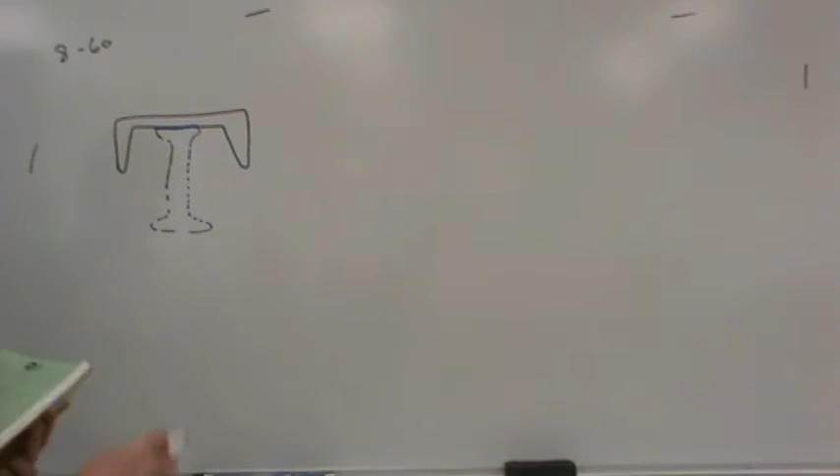Since that's the case, we'll have to choose a particular area and use it to calculate Q somewhere along the way. The particular area I chose is the area beyond. Now I just realized I made a mistake because I chose all of this area.

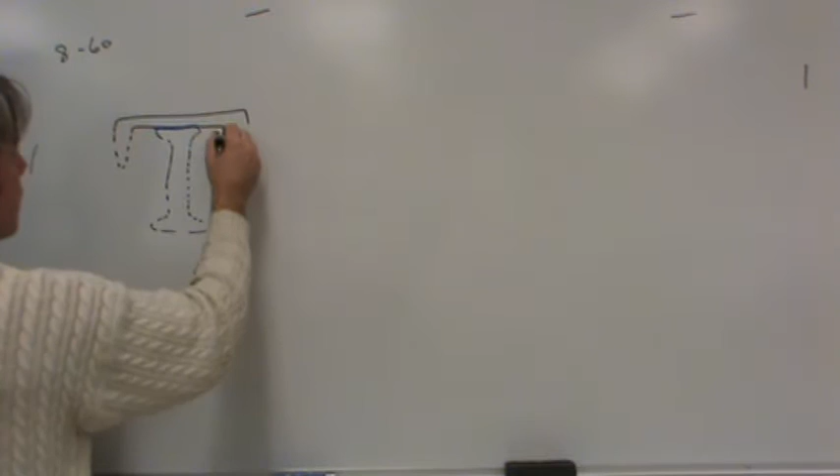I should have this also dotted because that area means I'll have to modify my solution, okay? But that's okay, we can do that on the fly. I should get a number fairly close.

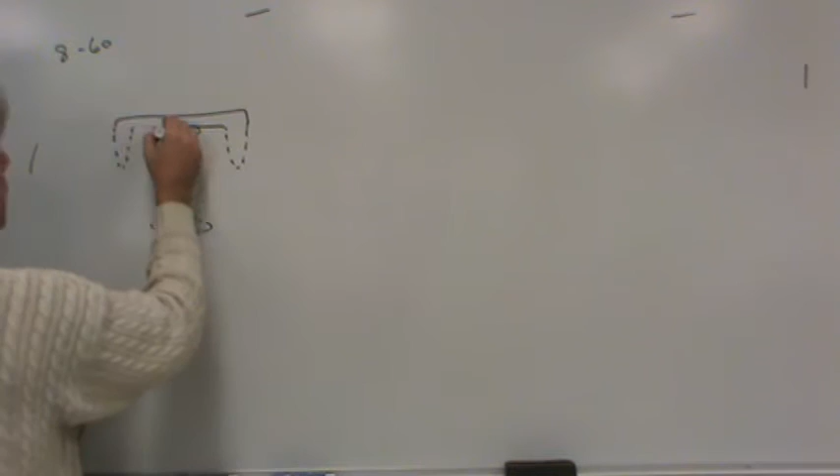Anyway, the particular area that I will choose -- oh, that one doesn't work, it won't show up on board or on video or anything. Let's try this one, see what happens.

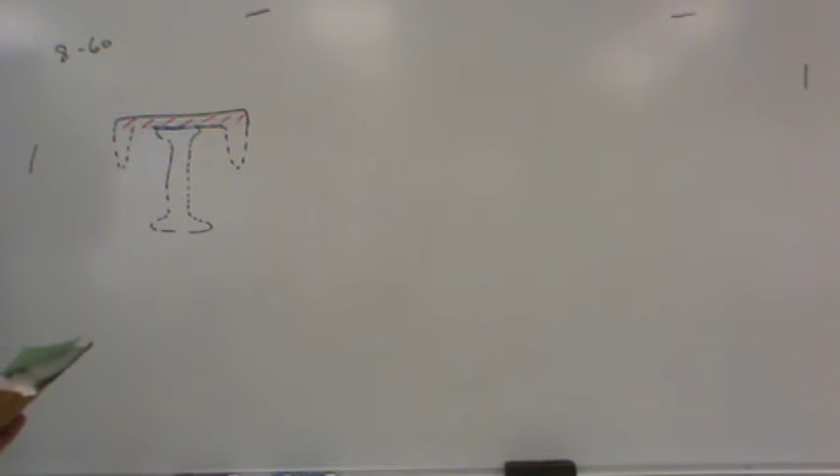Notice what I have to do is choose all the area beyond the axis of interest, okay? So we've got a small problem here though. Well, we'll get to that in a minute. All right, so

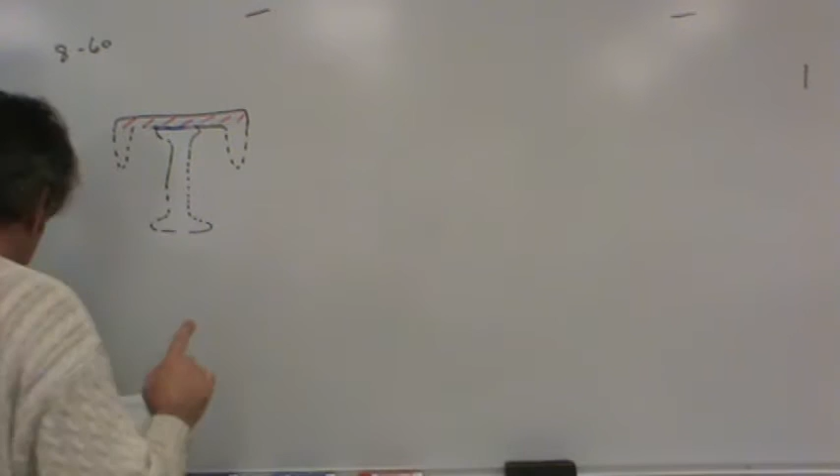really what we're trying to do is get at the shear flow, right? And the shear flow is calculated as VQ over I. Now, what I are we talking about here?

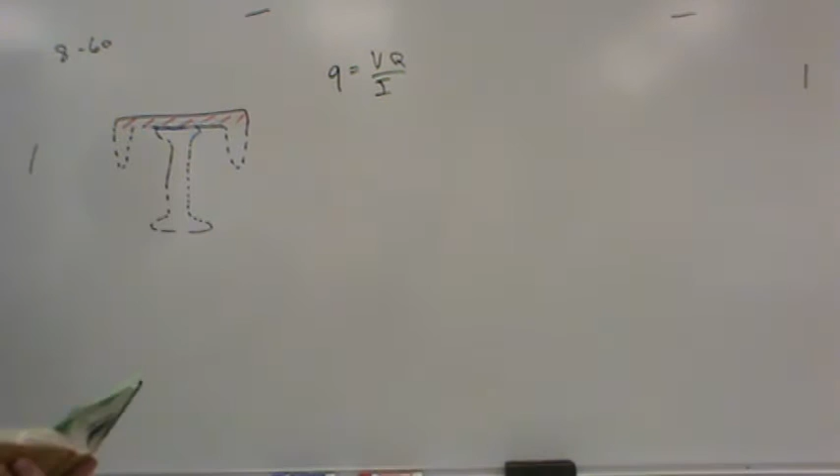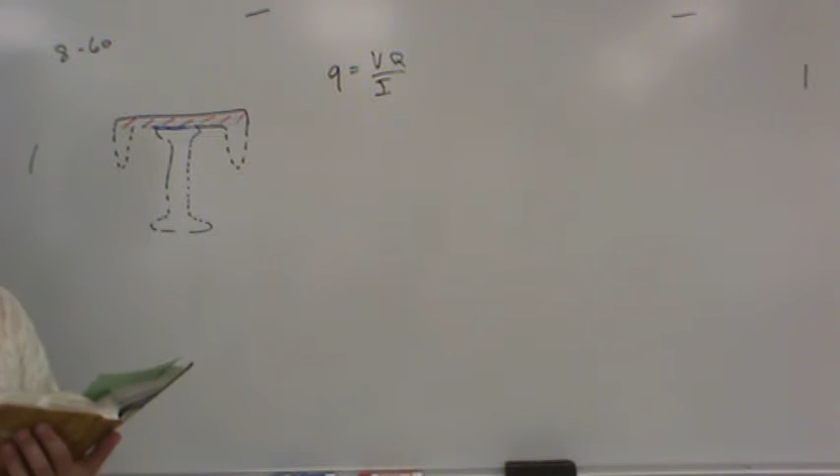Is it the I of this beam or the I of the channel? The whole thing. The whole thing, right? That's a trick question -- it's actually both together because this is all one area. Okay, so we need the I for all of this.

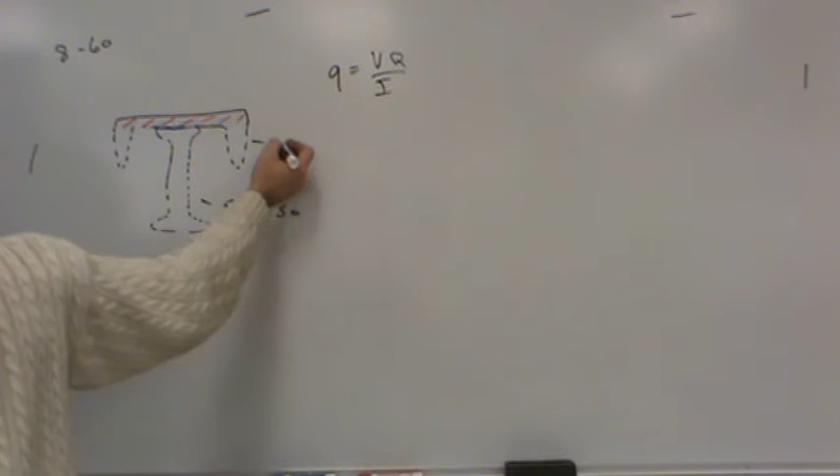Well, I did that. What I did is I went to the back of the book and I looked up the two shapes. This is an S12 by 50, and this is a C12 by 25. So I actually put a piece of paper back there in those two places so I could find all the properties I wanted.

And I started off my solution in Excel. In fact, if you look at my solution, what you'll find is I did a lot of work in Excel just because it was easier that way. So I wrote down the part numbers, the S12 by 50 and the C12 by 25.

I just read off the areas from the back -- that was easy. I read off the inertia moments from the back -- that was simple. Okay, now you have to be careful with the C channel.

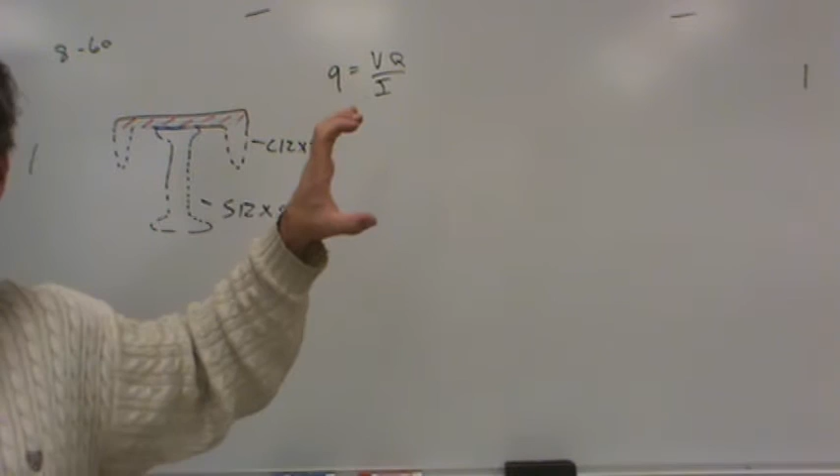The C channel in the back of the book is oriented like this, but we're using it like this. So I needed the area moment of inertia about this axis, which is the YY axis in the back of the book. Does that make sense?

You have to be a little bit careful about that, but anyway, there it is. And what about Y? What is Y? Well, Y is the distance from the very bottom up to the centroid of the area.

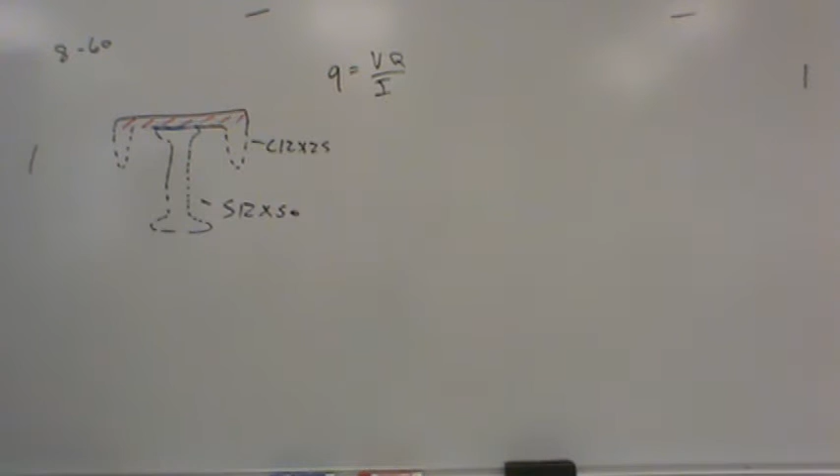So how tall is that S-beam? Did you look that up yet? It's 12 inches, that's right. So where's the centroid? 6 inches, right? So that's why I've got 6 inches here in cell C2.

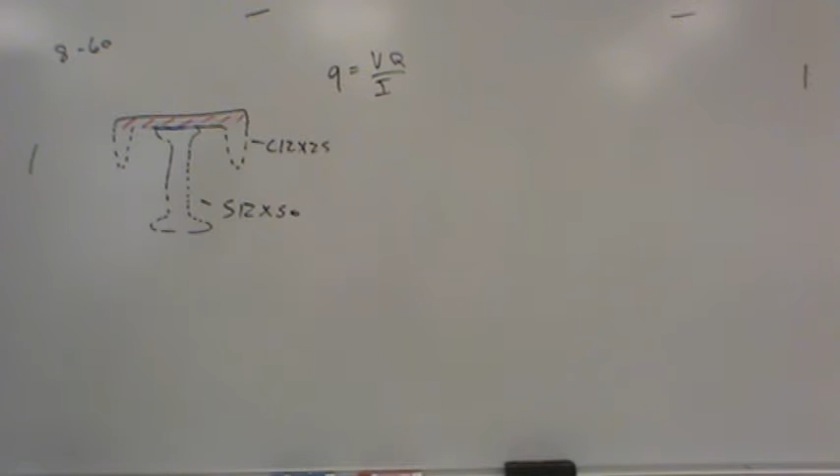Okay, now we also need the centroid of the channel, and that one's not quite as easy. The way I did that is since this dimension is 12 inches, all I need is the web thickness, okay?

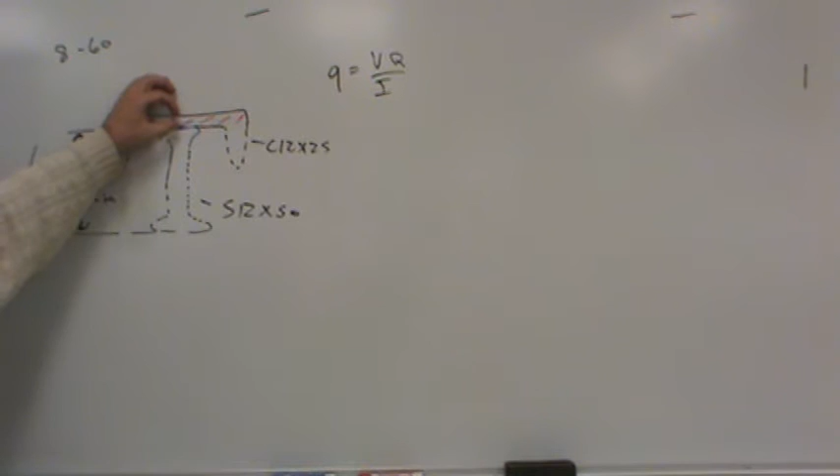So if you go and look up the web thickness in the back of the book, you'll find that it is 0.387. How do I know that? Because I typed it in as a formula so that if I ever thought I made a mistake, I could go back and see what I did wrong.

So I've got my 12 inches for the height of the S shape, and then I've got 0.387 for the thickness of the web. So that's the dimension from here all the way up to the top. So here's the extra -- let's try that a little better -- 0.387, okay?

And then, but I want the distance from the bottom to the centroid of this shape. Okay, now be careful, I'm talking about the whole thing right now. Ignore the dotted lines for just a minute, okay? So to the centroid of that -- well, where is the centroid of that shape? Well, if you look at the back of the book, you'll see that they give a distance x.

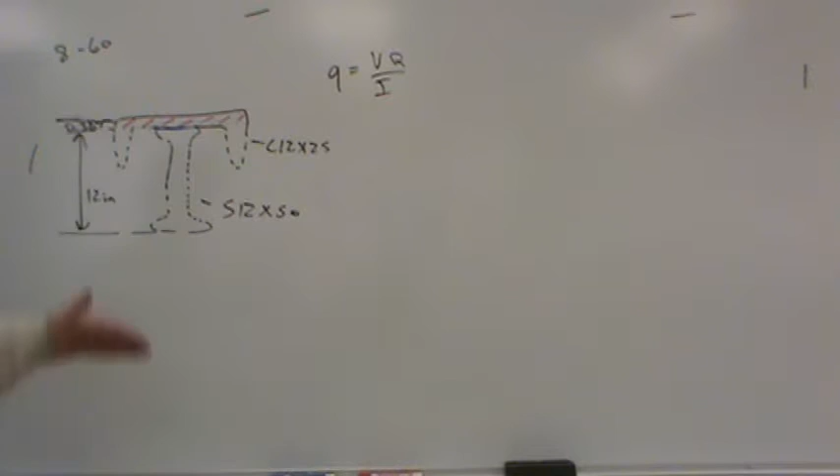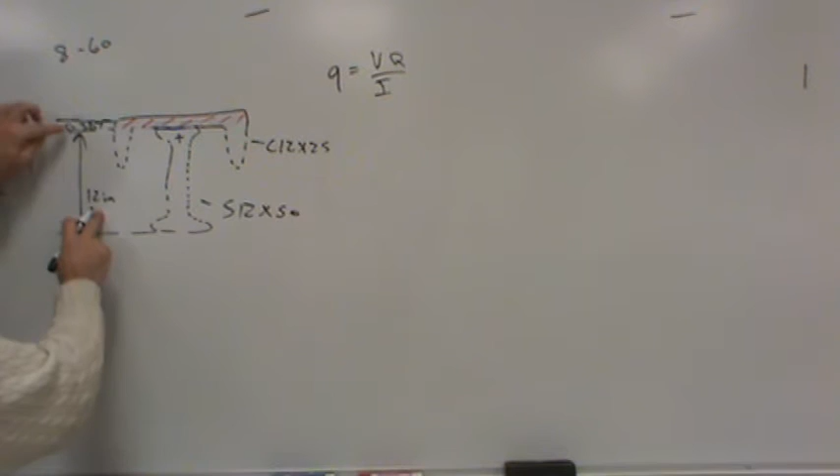That distance is 0.674 inches from this side down to the centroid of just the C channel. So basically I took 12 inches plus 0.387, less the 0.674. But so far, this is the simple stuff.

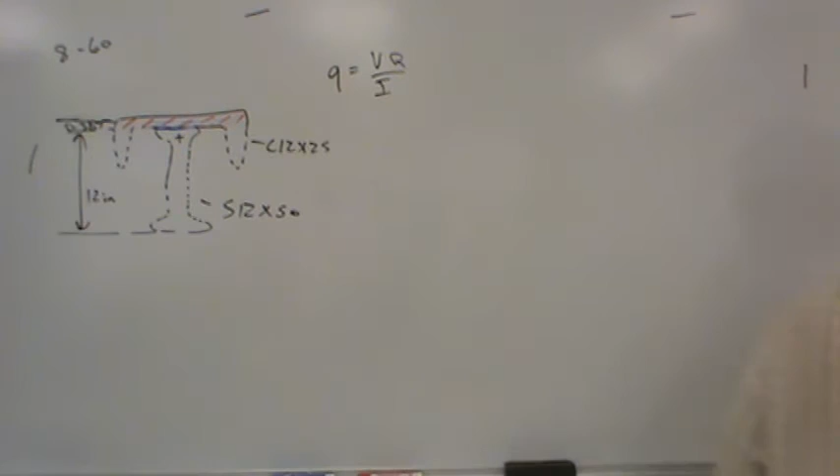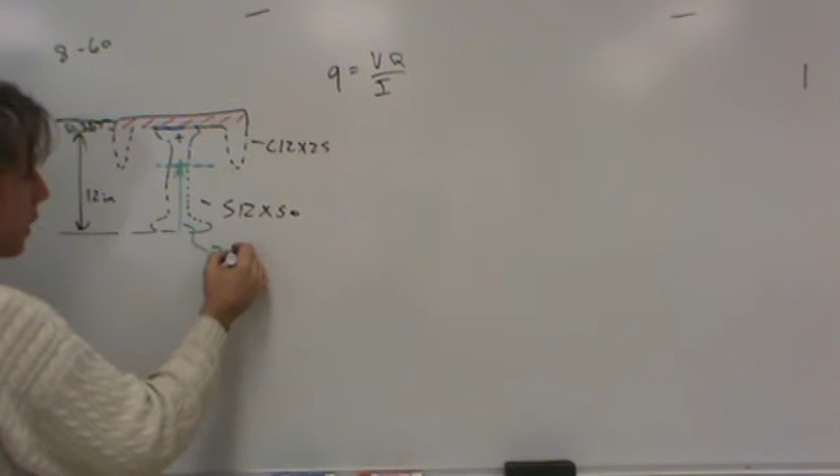That gives me what I need because I've got to find the centroid of the overall area. So there's the centroid, it's at 7.91 inches or so. Let's choose another color. For the overall area, the centroid is a little bit above the center. So there's the centroid of the overall area, and it's 7.91 inches.

So that tells me where that's at. Now, I've also got the total area, and I've got the sum of the AYs. The main reason for that is to get that centroid. Okay, what did I need to do next?

Here's where I may have made a mistake, because what I did is I included all of this area as the particular area. I wasn't thinking clearly. Really, this line here has to separate everything beyond it, and I guess I have to think about this a little more. I hadn't thought of it this way. We're not really interested in the stress over here.

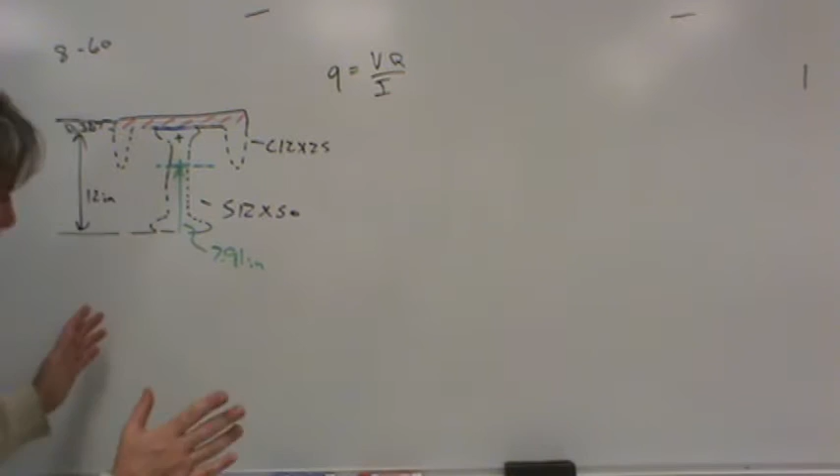I'll show you what I did, and then we'll modify it and see what we get for our next answer, and see how much difference there is. Let me explain what I did to begin, and I'm not sure that this is right.

Initially, I took the particular area to be all of that area. So then, that way, it's just the area of the C channel, and that's why I've got 7.35 square inches here for my particular area.

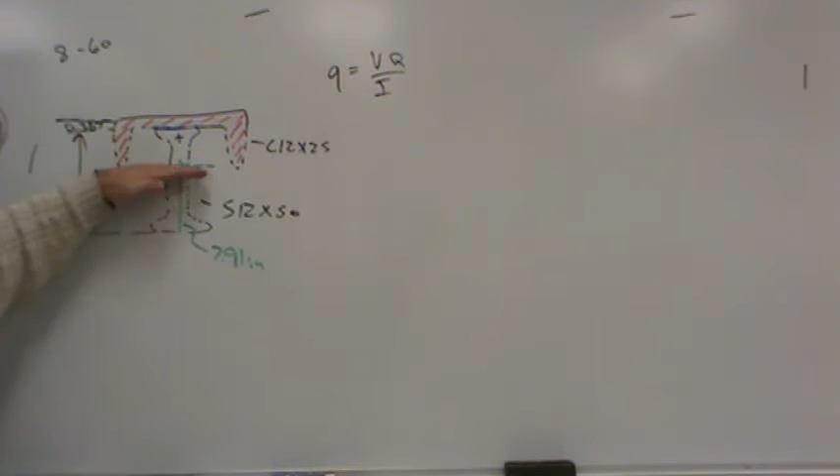And then Y has to be different, the distance from the centroid of the overall shape to the centroid of that area. Now the centroid of that area is just the centroid of the C channel. I calculated this distance as the total 12 inches plus 0.387, less basically this distance and less this distance, and that gives me Y bar.

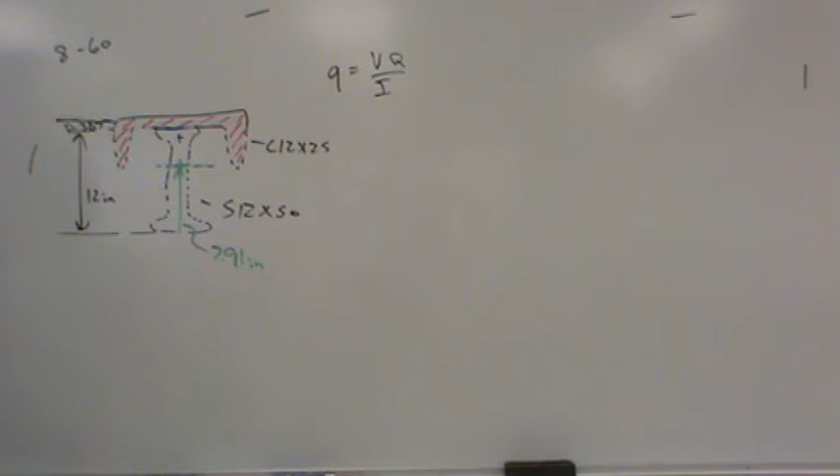So that's what I did. If you look in the spreadsheet, you'll see that's how I got the 3.8 inches or so. So it's just 12 plus 0.387, overall height, less X, less Y, capital Y bar. That gives me lowercase y bar.

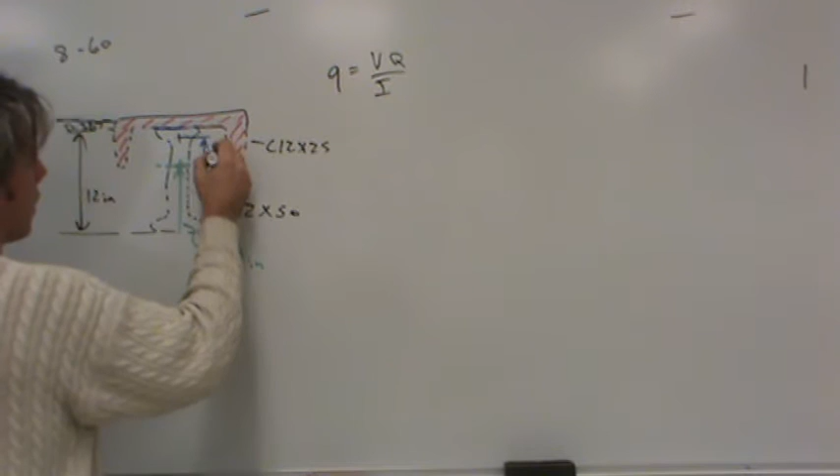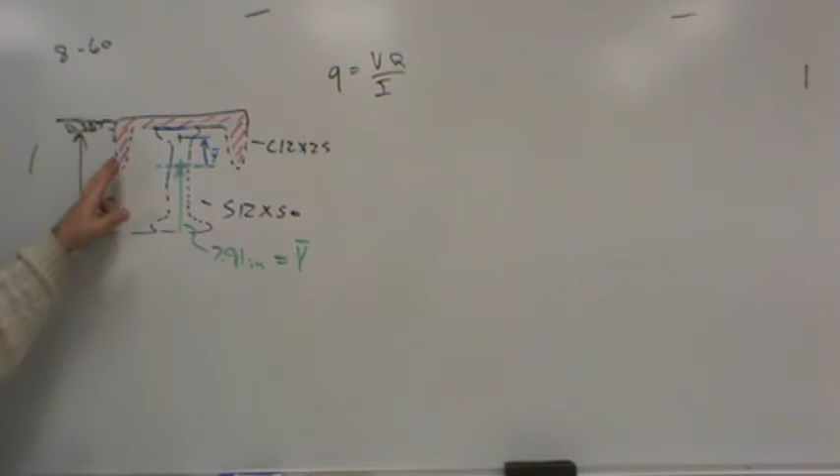So this distance here is lowercase y bar, whereas this distance here is uppercase y bar. That gives me the centroid of what I was calling the particular area. Again, I'm not convinced now that that's correct.

I could multiply those two together to get Q then. So AY, that is Q, because that's all there is to it. There's no other portion of the particular area to consider. And so that's what I got for capital Q.

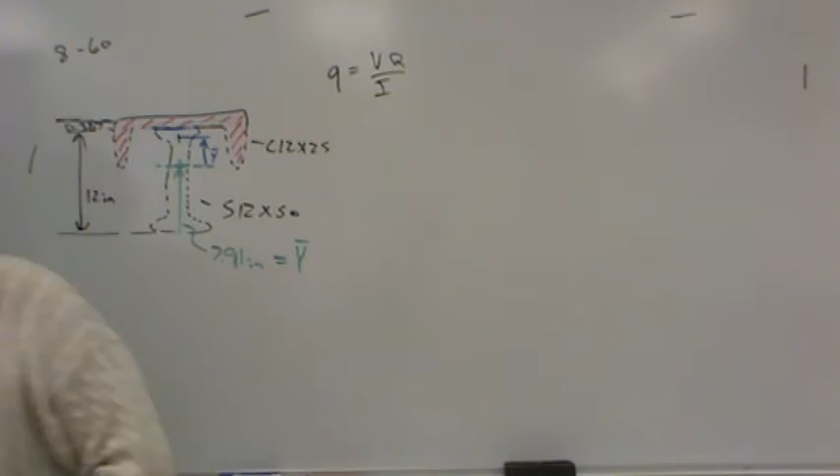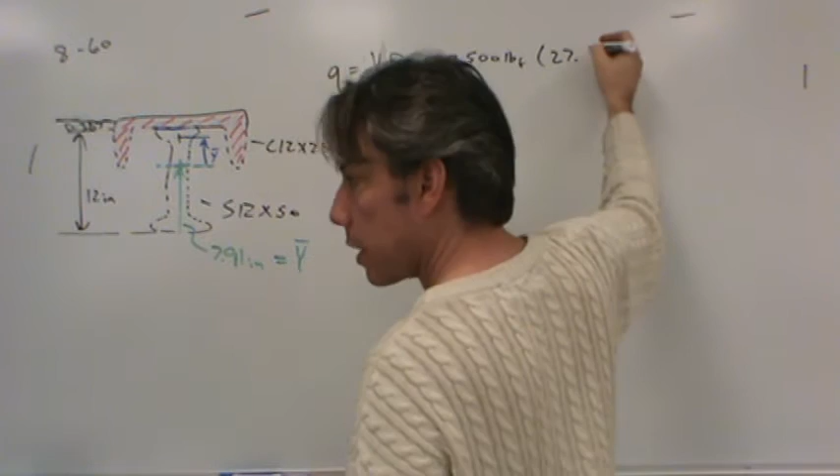Then to get the shear flow, all I have to do is plug in the shear force, which was given, 2,500 pounds, multiplied by the Q I found, which was 27.93 cubic inches, divided by the total area moment of inertia.

You have to be careful here. This I is for the whole thing, whereas the Q is just for the particular area. So that came out to 467.0137 inches to the fourth.

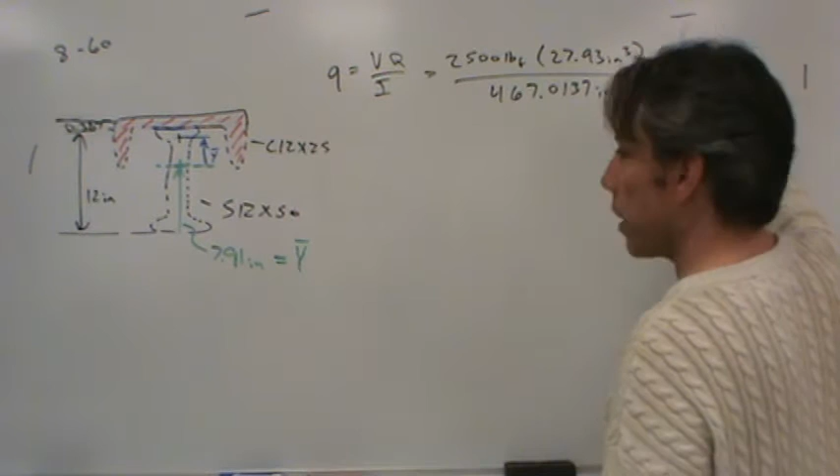So the units we end up with is pounds force per inch. From the spreadsheet, that came out to 149.5 or so pounds force per inch.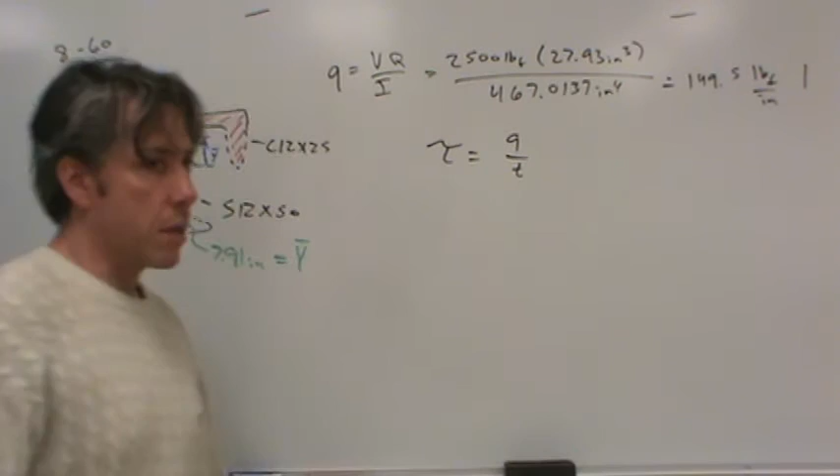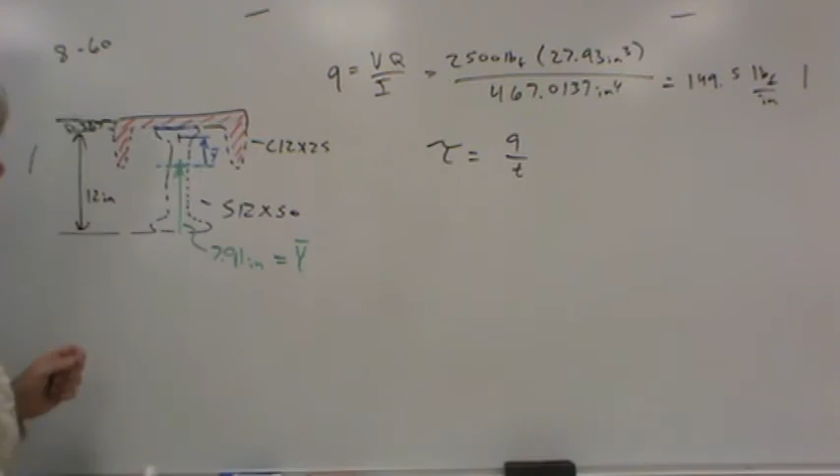And then the stress is simply Q over T, the thickness. I took the thickness T to be just this distance here. Now we can make an argument for using this as well, but this is the section that's stressed, this is the section that made sense to me. I'm questioning that part too, but I'll find out and get back with you for sure.

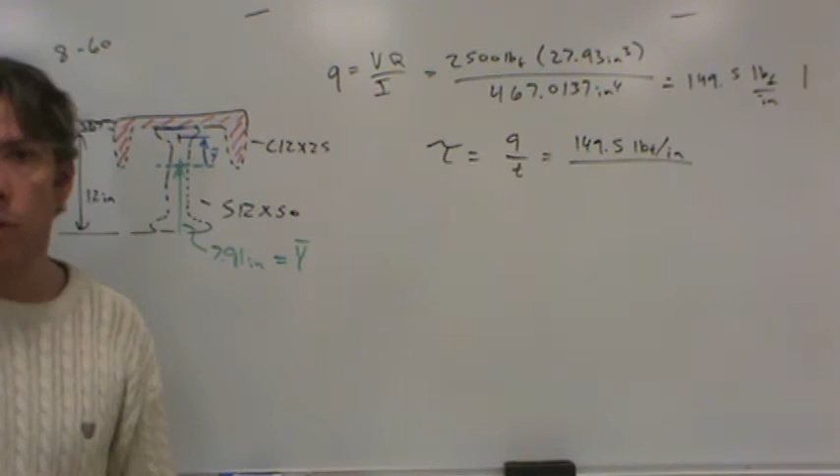So 149.5 pounds force per inch, and then T, well that's just the length of the web, or the width of the web. If you look that up, the web width is 5.48 inches. That's the distance from here to here.

It's getting a little messy. 5.48 inches, and that's what I divided by. When I did all of that, no, why am I crossing those off? Those don't cross off, they're squared. They're multiplied by each other, so it ends up being inches squared.

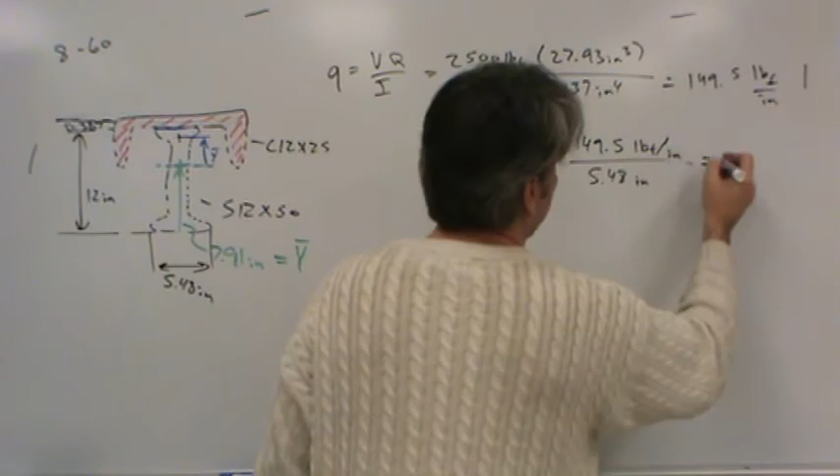When I did all of that, I found that the stress in PSI is 27 PSI.

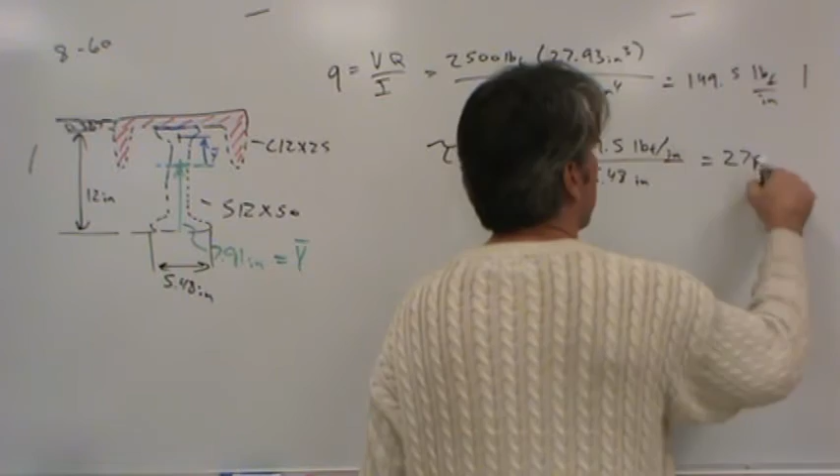It should be pretty easy to hold those two together. Now, like I said, I think I've got a mistake here because the area should be just the area beyond. In a way, this area is area beyond because we can keep going out into that web. And if I'm only going to use this as the thickness, then I think this would be correct. I'll have to think about this a little farther and figure it out.

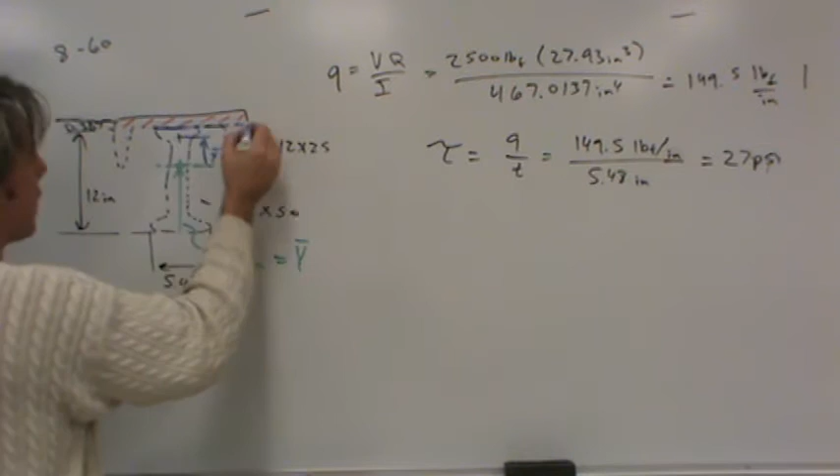What if we do it the other way? What if we say no, the partial area is just the area beyond this axis, and then I think we can only reasonably extend the axis out here, okay? Now that would make sense.

Imagine this for just a second. What if we had welded these two together? What about if somehow we had connected the C channel to the top of that I-beam permanently? It's just metal all the way through. Maybe we just formed the thing that way. Then what would we do?

Well, I think then we would use an axis all the way through. So I think this is valid, okay? I think this will be the better analysis.

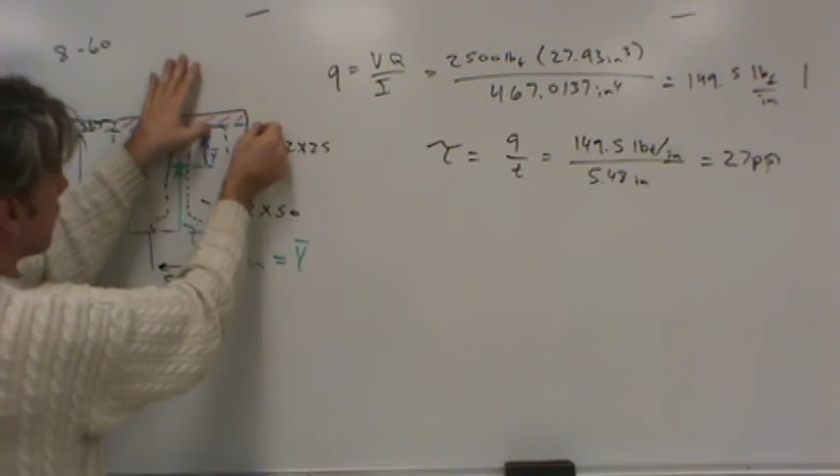But we'll have to be careful because we don't want the thickness T to be the entire length from here to here. We want it to be this distance plus this, because we're interested in the stress just to this side. That makes sense?

We're not interested in the stress in the metal. We know the metal will be able to take it. We're interested in the stress in the glue, and that's just below the surface. Okay, so let me analyze it that way, and we'll see what happens.

So that's going to, what's that? Okay, well what that's going to do is that's going to change the partial area. So let's go back and figure out what would happen.

What I'm going to do in my spreadsheet is just copy, let's see, is that the best way? Yeah, let's just do it this way. We'll have one alt. Okay, so now the area that I'll use will be the area just in the web of the C channel. So let's see, what would that be?

I'll have to go to the back of the book and look up the properties of the C channel. Let's see, standard cross sections. I finally have put a tab in for stuff in my book like I tell you guys to do. All right, so let's go to C channels, and that is page 698, appendix A6.

So reference row D is what we're looking at. That's the C12 by 25. So if we want that area, let's see, it's going to be the web thickness multiplied by the depth. So that's going to be 12 times, let's see, where's the web thickness? We've already used it, 0.387.

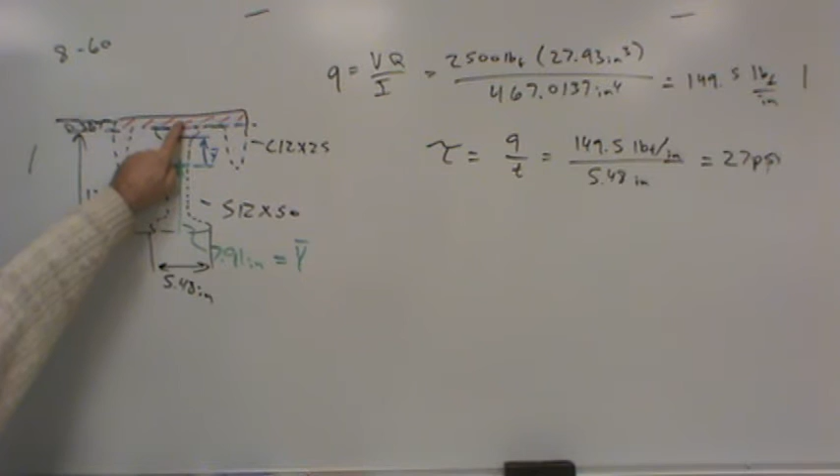So let's see, equals, and I'm modifying the spreadsheet if you're watching the video. 12 times 0.387. Of course, you'll just see the result, so it'll be the one alt row. Okay. Now Y, that's going to be the distance to the centroid of the particular area. If this is the particular area, well then it's just a rectangle, and the centroid is going to be half of that thickness plus this.

Make sense? So Y would be equal to 12 plus 0.387 over 2. And then I can multiply those two together. Oh, wait a second. I just made a mistake. What mistake did I make?

I took the distance from here to the centroid of that area. I should have taken the distance from the centroid of the overall area to there, right? So I actually have to subtract off Y bar from the number I have, capital Y bar. Almost made a mistake. So minus capital Y bar, there we go.

All right, so then if we multiply the two together, we should do it. Yeah, there we go. So there's the new value of Q. What I'm going to do, I guess, is, let's see, probably the best way to do this is to just have a whole alt section.

And so that's going to have the same sort of thing. It's going to have the capital Q area property. It's going to have the lowercase q shear flow as well as the shear itself.

So now, let's see, now Q will be 19.88 or so. The shear flow, lowercase q, well that's just VQ over I, so it's 2500 multiplied by capital Q over, we still have to use the overall area moment of inertia.

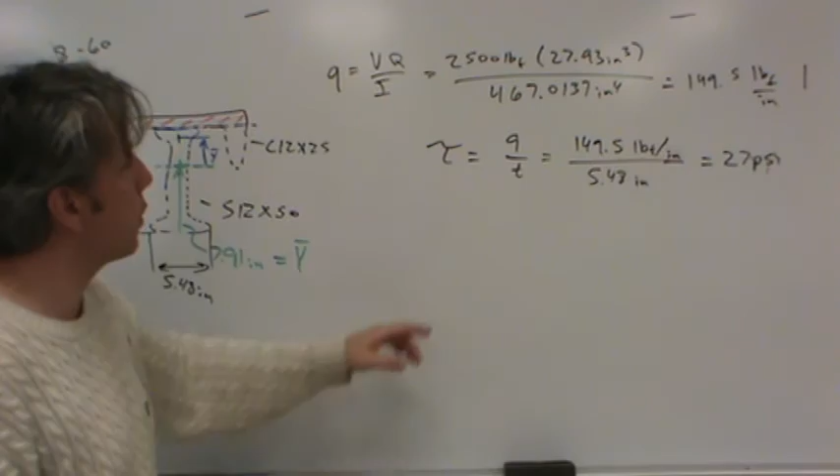And then the stress, let's see, the stress is going to be the new shear flow, which by the way, the new shear flow number is about 106.4. So let's do it this way, for the sake of the video, tau alt is Q over T. These two are going to be different, of course, now, because we're dealing with a different area.

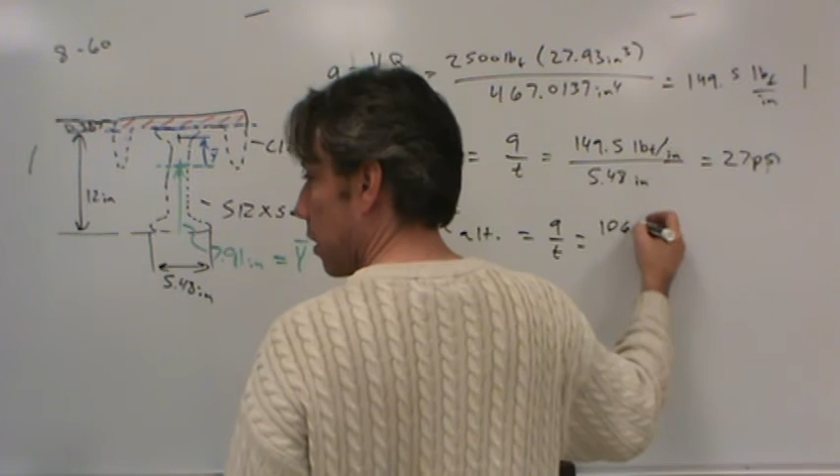So it's 106.4 or so pounds force per inch divided by T. And now T will have to be this distance plus this distance plus that distance. Make sense?

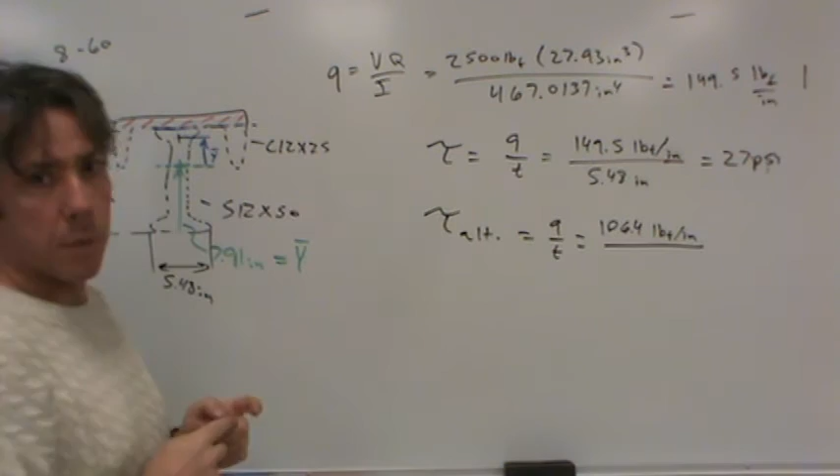Okay, so let's see, this will be Q divided by a quantity, and we already know that the flange here has a width of 5.48 inches, so we can type that in. But now we also need more properties of the C channel. We need to know how thick the flanges are. Let's see, flange width, there it is. There's two of them. There's a TF and a BF.

Which one do you think it is? I'm on page 698. It's pretty obvious if you look at the numbers. It's TF, right? It's the smaller number. It's about a half inch, so 0.501. So 2 times 0.501. Why did I multiply it by 2? There's two flanges. I need thickness here and thickness here added together. So I just multiplied one of them by 2.

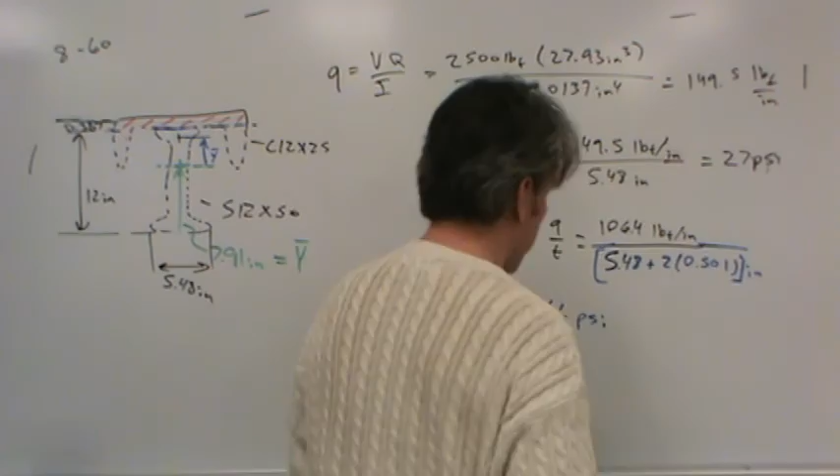Okay. Hit enter. Now I got 16 psi. It's the same order of magnitude. So this would have to be 5.48 plus 2 times 0.501, and of course those are all inch units. And so now I've got about 16 psi. Which one's correct? I'm leaning towards this last one. I think it's probably correct.

But I need to look into shear flow and see if I can actually cut it here and then continue the area on around. It seems like I'd have to do that to be consistent. But thinking of this as one solid piece, that wouldn't make any sense. So I think our second analysis is actually probably correct. Okay? Questions, comments?

Why did you change the thickness the second time? Why did I change the thickness the second time? Because the first time I just used the width of the flange on the I-beam as the thickness. The second time, since I was changing the area to be literally the area geometrically beyond the axis of interest where I wanted the stress, I decided I would have to use this material over here as well as part of that thickness.

Remember the problem the student asked about earlier, where there was a triangle on top with a window cut out of it? I said you had to use the thickness from both sides. Well, that would be the same principle here. Does that make more sense now? Yeah. Good question. Any others?

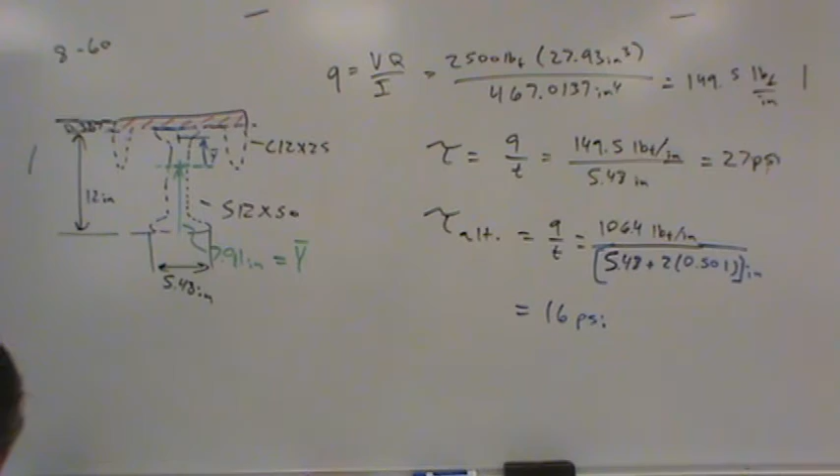Whenever we did the example last class that was shear flow, we did use just the smaller portion. I may have made a mistake then too. I don't know if it was an I-beam or a 2x4. What problem number was that? I don't recall. I've got it over here in my examples. It was like 58 or something. Okay. I always mark them in my book. 59. Okay, well in that problem, we use the thickness on either side, which would be consistent. You're talking about 59E, correct? Okay.

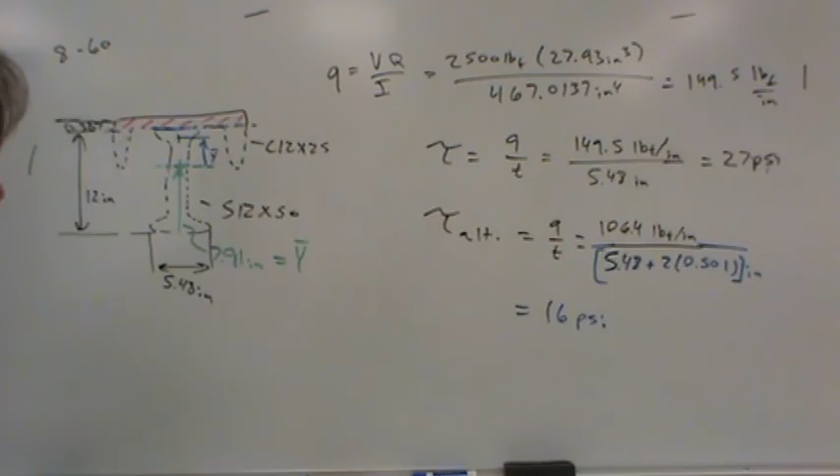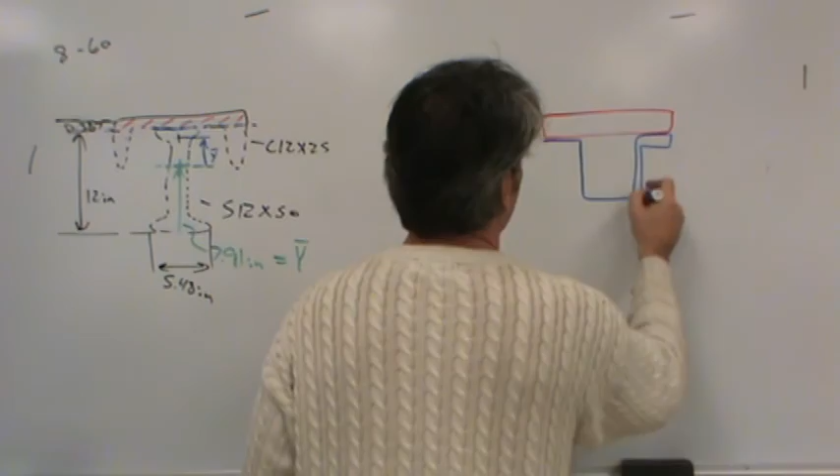See, the key difference here. The problem you're referring to looks like this. Let me draw it upside down if that's okay with everybody. The problem you're talking about looks like this. And what I did is I tried to solve for the stress in those areas, okay? Now, this problem is different from this one.

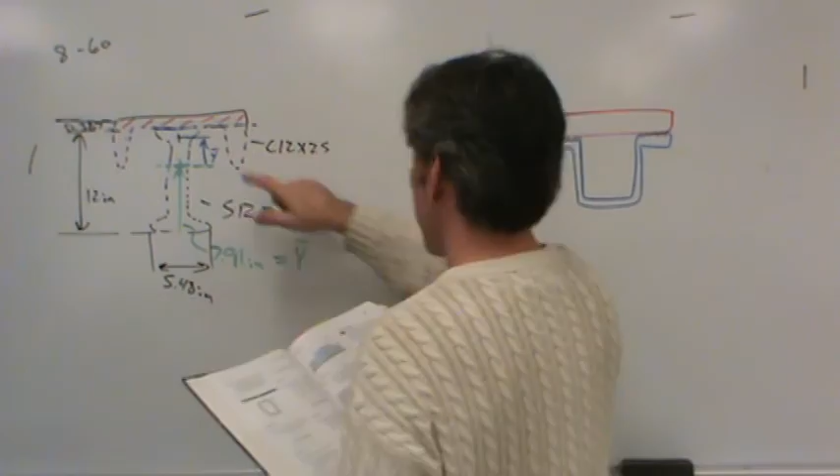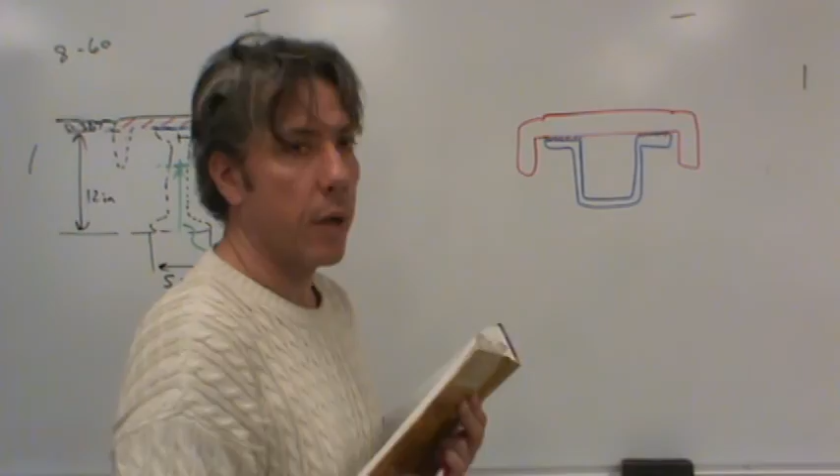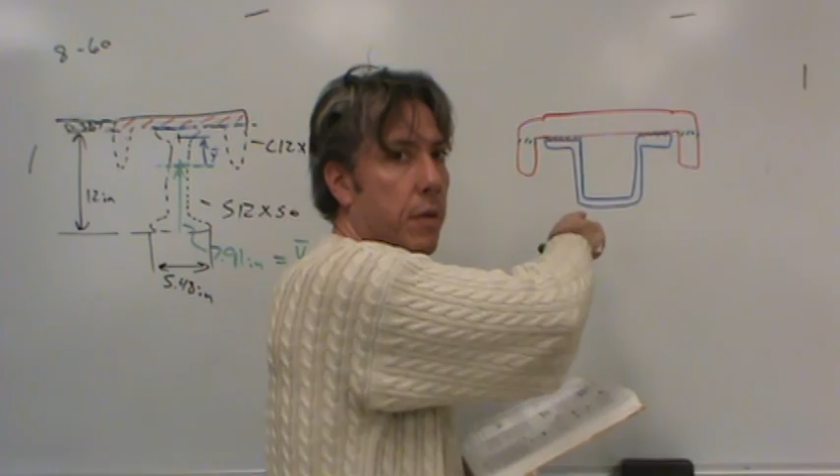It would be more similar if there was also some material like this, right? Then we'd have the same kind of problem. We wouldn't know if we need to also include this thickness, okay? So I think fundamentally they're different. So I think what I did last time was okay for that one. But it would be confusing in the way this one is if it was shaped like that. But it's not. So I thought we were using the thickness of where the two contact each other. Right, well, think about this as if it was one solid mass.

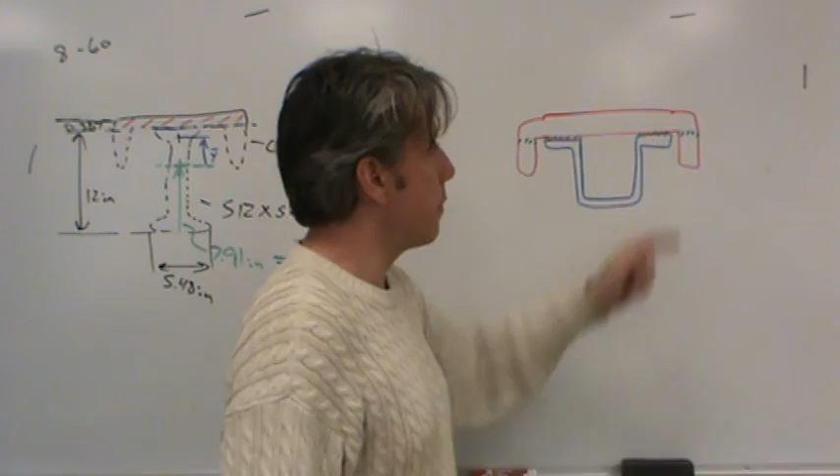In fact, let's take this even farther. What if the shape was literally like this? What if it went over, came down, came up, back, something like this. And that would be that surface. Gotta make this a little smaller. In fact, let me exaggerate so it'll be clear what I'm trying to say. See what I'm saying? What if it's all solid?

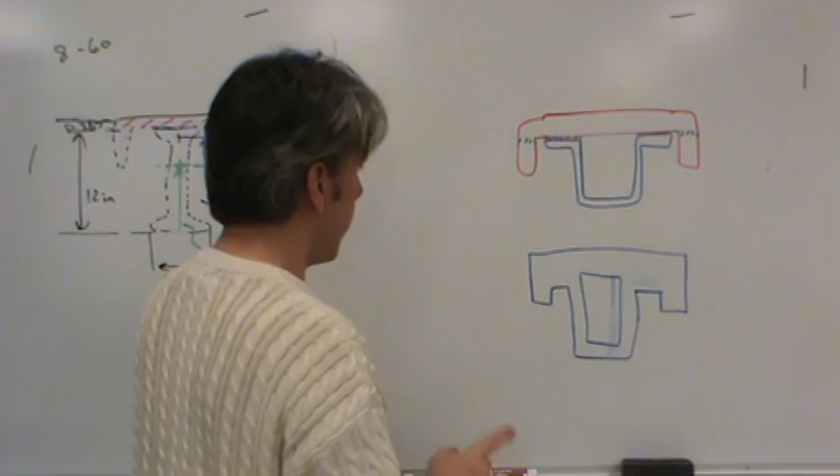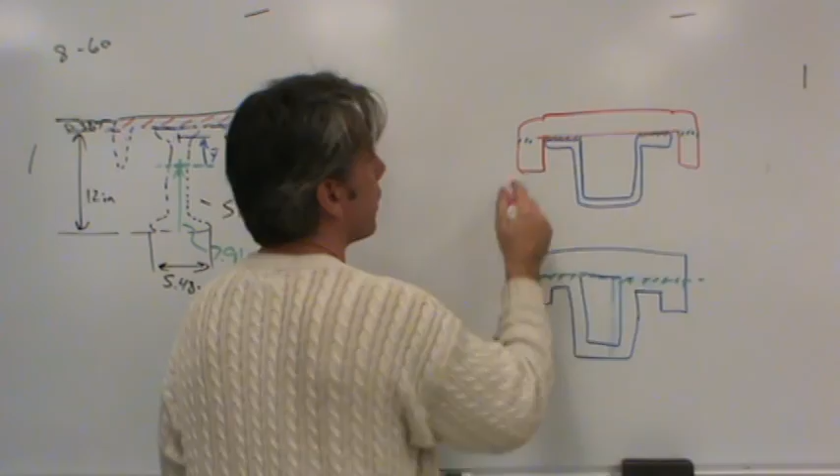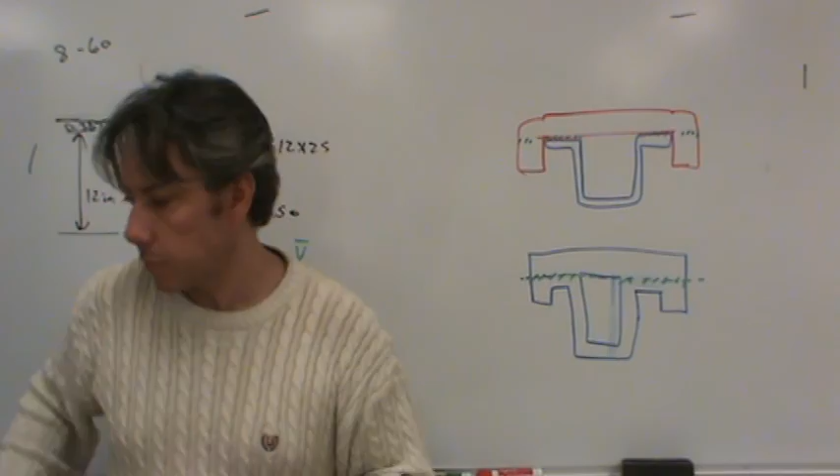Well, then if we're interested in what's going on at this cross section right here, then we have to use all of that length as the thickness. Not this, right? But these two, if it's solid. And so that would be kind of like it came right down there. Okay. So I think it's consistent. I think I've done the same thing in both cases. I'm either right both places or I'm wrong both places. That's what consistency is, right? Any other questions or comments?